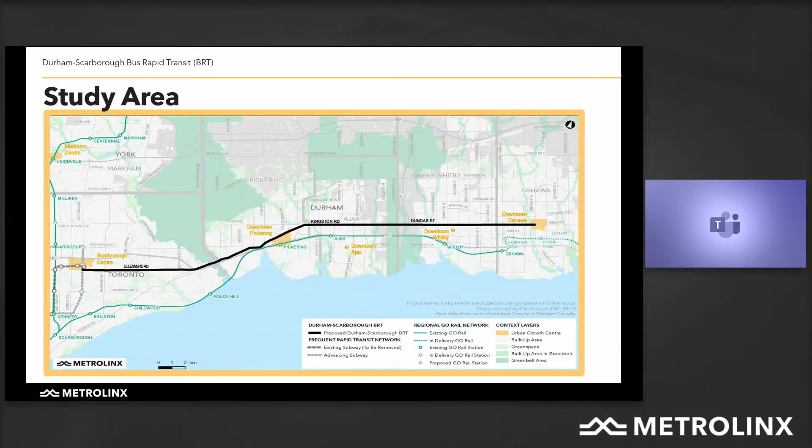If we could move to the next slide, please. So the study area for this project extends for 36 kilometers from downtown Oshawa through the western part of the city of Oshawa, through Whitby, Ajax and Pickering, crossing into Toronto and then transitioning up from Highway 2 along Ellesmere Road as far west as almost McCowan, where we will interface with the planned extension of the Scarborough subway. So the 36 kilometers will have about 49 stops along the route, spaced to provide good service along the entire corridor. You'll note as well that the GO train service is also there, shown in the green line closer to the lake. It actually serves quite a different travel market.

The GO train users tend to be focused on travel into downtown Toronto, and you'll also note that the GO train really does not serve the Scarborough Centre area or downtown Oshawa particularly well. So what we find is that this service is being proposed to be operated by Durham Region Transit, to run in parallel with and augment the network of routes and services that are provided for the residents of the east end of Toronto and for Central Durham Region.

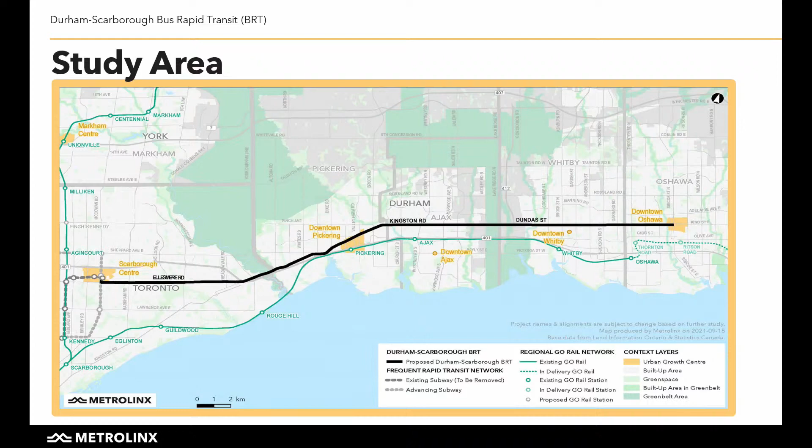Could I have the next slide, please? So as I mentioned, it is a 36-kilometer route through 5 municipalities. It will build on the TTC service along Ellesmere as well as the Durham Pulse 900 route, which is the heaviest used route in Durham Region Transit, carrying more than 3 million passengers last year, or the year before. It currently terminates its western limit at the University of Toronto Scarborough campus. The intention is to extend that route to Scarborough Centre, into the subway station, and to allow Durham to pick up passengers along the corridor.

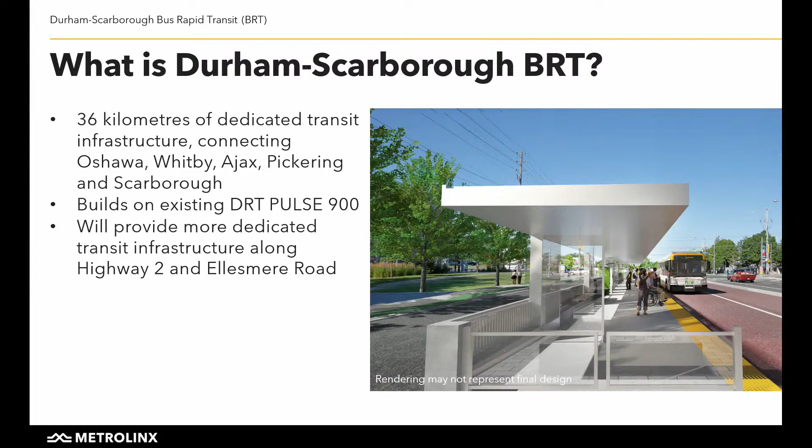So people who live in the Toronto segment, or who are traveling in the Toronto segment, will be able to use either vehicle to move along the corridor in the dedicated lanes. As well, the dedicated infrastructure is being proposed to improve the speed and reliability of the service, primarily the reliability. We know that every transit trip is at least twice as long as the average car trip. So providing this kind of reliability, and providing higher quality stations as we see here, will encourage more people over time to take public transit as the region continues to grow.

The next slide, please. So BRT is more than just buses and more than just lanes. It's a combination of a whole series of things. As I mentioned, dedicated lanes are good for shortening travel times, as well as improving the reliability of the service. Anyone who's waited for the bus knows that if you wait longer on the occasional time, you start to plan for that every day. What we're hoping is that you will not need a timetable to know when to go out for the bus — they'll be there every 5 minutes or more frequently during peak periods. You go to the nearest stop and get on the bus without having to think about it. It also includes smart traffic signals that will be installed and will communicate with the buses so they can be held as green, allowing the buses to move more smoothly and stay on schedule.

What we also find with these smart signals is it actually makes for smoother traffic flow for everyone using the road. The service will also provide better connections along the corridor.

The dedicated lanes in the city of Toronto will provide common stops for TTC as well as DRT and the occasional GO bus. But we've also planned stops for all of the perpendicular bus routes so that people who need to travel north or south off of the corridor at the beginning or the end of their trip, or both, will be able to do so quite conveniently.

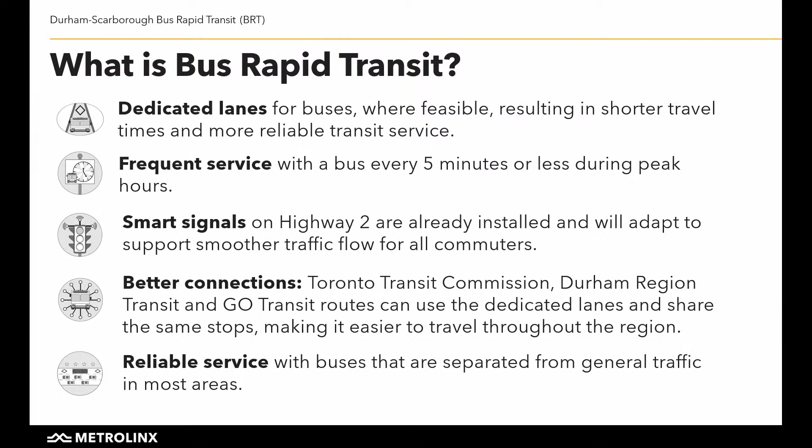As I mentioned, the reliability of the service comes from separating it from the general traffic. We see several other benefits of that, including enhanced safety, reduction in left turn accidents, and other benefits along the corridor, which we'll discuss a little bit later.

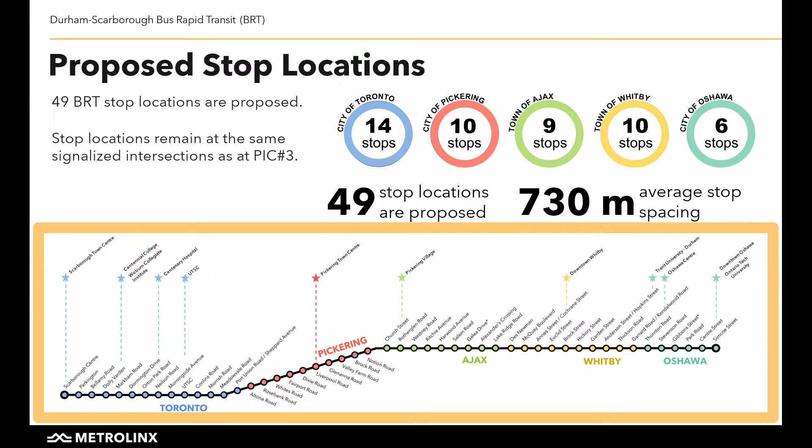As I mentioned off the top, we're planning 49 stops, about 730 meters apart. That's typical for BRT—a little wider than spacing on a typical bus route, but that allows us to have good quality service in terms of average speed and coverage. The stops are closer together at the west end near Scarborough Centre and in urban areas like central Pickering, Whitby and Oshawa, and further apart in areas like the Rouge River Valley or Highway 412, where there's really no origin or destination for people.

So I'm going to quickly run over the preliminary design in each of the areas. In Toronto, there are 6 different zones, starting at the west end, just where we come out of Scarborough Town Centre. The Scarborough subway project is looking at the final connection and the number of bus bays in the bus loop with the subway station.

Our work actually begins with the first physical infrastructure on Ellesmere Road, starting at Grangeway, one block east of McCowan. From Grangeway all the way out to Morningside, just west of the University of Toronto, the intention is to widen the road from 4 lanes to 6 lanes, maintaining the 4 current travel lanes for cars and adding 2 lanes for BRT. That will allow existing traffic to travel as well as providing increased capacity for transit.

In Zone 2, in front of the university, the design is coordinated with the Eglinton East LRT as well as the university's master plan. The buses will transition out of dedicated lanes to the curbside to match the stops for Eglinton and the university. Just beyond a realigned Military Trail, we get into Zone 3. From the east side of the campus as far as Meadowvale, the intention is to maintain the existing 4-lane roadway but convert it to 1 lane in each direction for general traffic and 1 lane in each direction for transit.

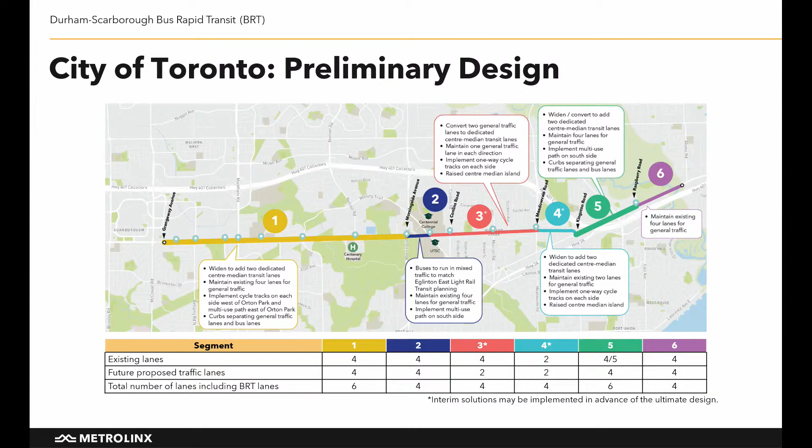Moving into the city of Pickering, the intention is to widen the road from 4 lanes to 6 lanes everywhere that has not already been widened throughout the entire width of the town. In some areas, there are curbside bus lanes implemented over the last 3 or 4 years. As the median BRT is implemented, those curbside lanes will transition to median lanes, creating a continuous center BRT across the city of Pickering.

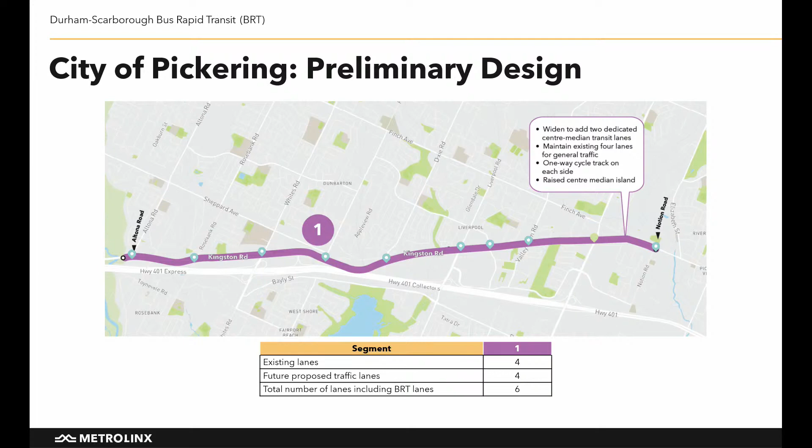Within the town of Ajax, we have 3 separate segments, starting at the west end between Notion Road and Elizabeth Street in Zone 1. The intention here is to maintain the existing number of lanes and add the transit into the median.

In Zone 2, we're into the historic Pickering Village, which begins at Elizabeth Street and runs as far as Rotherglen Road. The intention here is to widen the road but actually create what we call an asymmetrical road—a 5-lane cross-section, with 1 general lane of traffic westbound, 2 BRT lanes in the middle of the road, and 2 eastbound traffic lanes on the south side. The reason is to balance the need for general traffic, the need to preserve the culture and heritage of Pickering Village, and to provide the transit facility.

What we found in the traffic analysis is that the westbound traffic in the morning can be handled in a single lane of traffic, but the eastbound traffic in the afternoon requires 2 lanes of travel. So we've adopted the 5-lane design in order to balance those 3 priorities.

East of Rotherglen Road and as far as Lake Ridge Road at the east limit of Ajax, the intention is to widen from 4 lanes to 6 lanes to insert the 2 BRT lanes in the middle and maintain the existing capacity for cars and trucks. Go to the next slide, please.

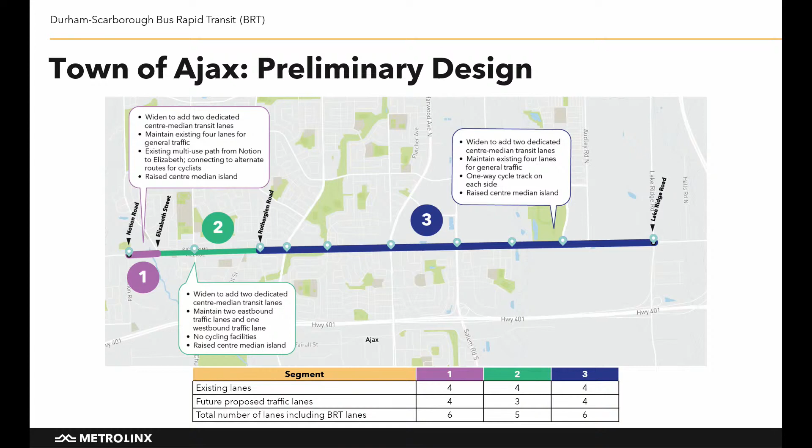This is to balance off the need for business access, the need to continue to move cars and trucks through downtown without diverting into local neighborhoods, as well as providing the highest degree of transit priority as we can. So the intention there is to balance the use of the road with the use of the space adjacent to the road and maintain the community without causing a lot of local traffic infiltration.

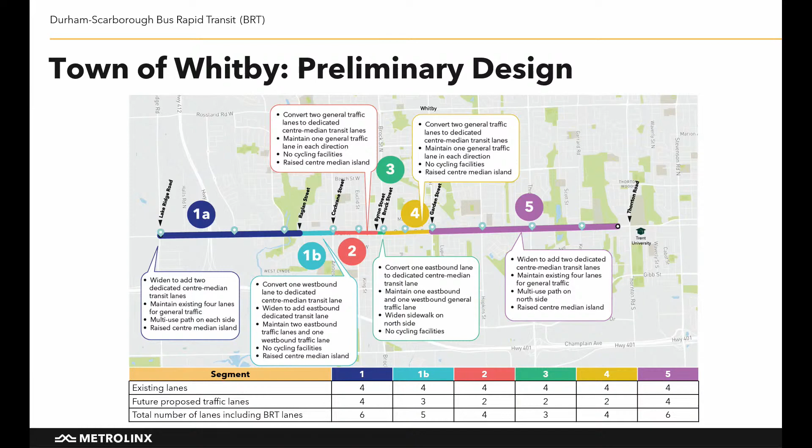There are still a few things to sort out there, but generally that will be the solution. Could I have the next slide, please?

At the easternmost end in Oshawa, there are 3 segments, starting at the Whitby boundary as far east as around Waverly Street, where King Street and Bond Street split into a 1-way pair. We will be widening from 4 lanes to 6 lanes and inserting bus lanes in the middle.

Once we get as far east as Waverly, we'll be inserting a new traffic light, both to allow for westbound left turns to get down into the community behind Trent University, but also to get the buses through that intersection where they will then transition out to the curb.

Through downtown Oshawa on the 1-way eastbound King Street, we will be having a dedicated curb BRT and 2 through lanes of traffic. When we get as far east as Simcoe Street, the BRT lanes will end, but the buses will continue in mixed traffic as far east as Ritson Road, where they will have a layover that's currently used by the Pulse 900 service.

They'll come back westbound in mixed traffic as far as Simcoe Street. And when they get west of Simcoe Street, again, there will be a curbside BRT lane along the 1-way street of Bond Street all the way out until it connects back in at Waverly there and then rejoins zone 1. Go to the next slide, please.

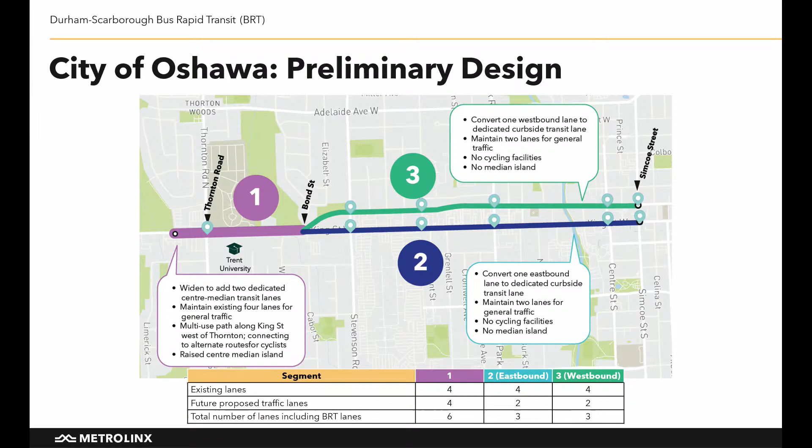So a little more detail at the east end of the corridor. The intention here is that the buses will go east on King Street and north on Ritson Road to the layover, which is on William Street, just south of the Costco, for those of you who know the area well. And then the buses will return westbound on Bond Street.

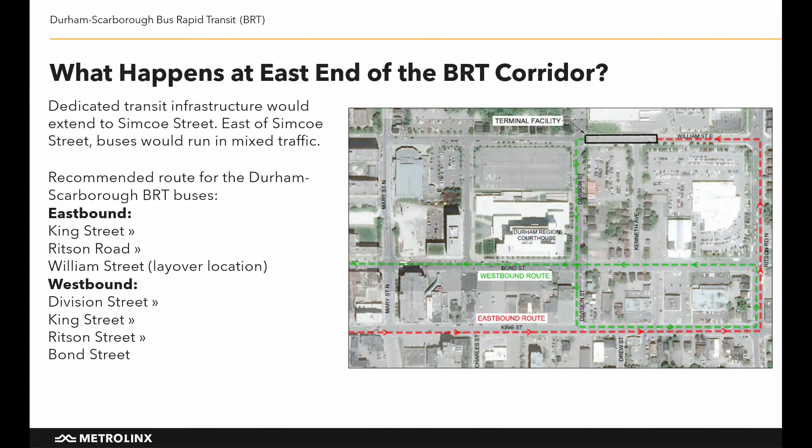This will be an interim condition. The intention is when the GO train line is extended further east and there is a new GO station at the south end of Ritson Road, that this service will be extended from Simcoe Street to the Ritson GO station, but that will be part of a future study. Can I have the next slide, please?

As I mentioned at the west end, the dedicated facility we're looking at will extend as far west as Grangeway Avenue. You can see the star on the map, which is the proposed bus terminal for the Scarborough subway. That project team is looking at the size of the bus terminal to suit all of the routes that will feed in there, and they will be providing bus bays for the BRT service, which will then operate in mixed traffic on Grangeway Avenue before joining the dedicated lanes eastbound and westbound in the middle of Ellesmere Road.

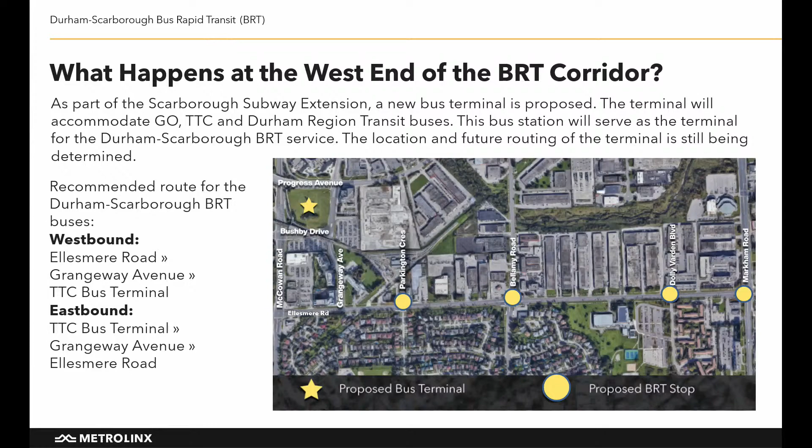Go to the next slide, please.

As part of the TPAP study, we are required to do a series of environmental studies. They're intended to document the existing conditions so we can understand what's happening. We then look at the project footprint and superimpose that over the existing conditions to look for any potential impacts, and then look at ways to mitigate or reduce those impacts, either through modifying the design or finding mitigation measures. All of these studies are nearly completed and will be included in the environmental project report released in January 2022. They cover the full range of features.

We're looking at natural heritage, flora and fauna. We're doing a complete tree inventory, a noise and vibration and air quality assessment, and looking at the impacts of climate change, drainage and stormwater management. On the social environment side, we're doing a stage 1 archaeological assessment, a cultural heritage resource assessment, as well as a socioeconomic and land use study, so that we have a complete picture of what's happening, as well as developing a complete set of mitigation measures.

Can I have the next slide, please?

What we have found on each of these studies is that this is a highly urbanized corridor, not surprising given where we are. Other than a few localized spots, the typical mitigation measures that would come from a typical road widening construction project will address all of the environmental issues we're finding. We're expecting that the impacts would be very similar to a road widening.

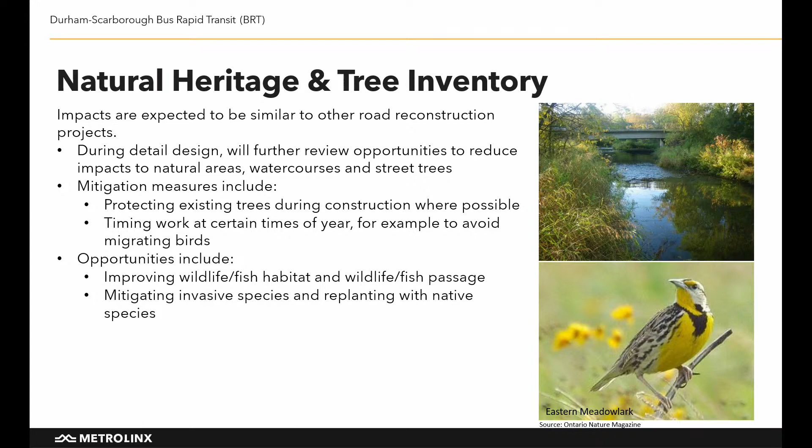Cultural heritage and archaeology: we've been through a full assessment of all of the buildings, done through a visual assessment and a review of all the municipal, provincial and federal registers for heritage structures. We've done research on properties that appear to have heritage character, and worked with advisory committees in each of the municipalities to understand what they know about some of these buildings. We're also working with Indigenous nations as well as the Ministry of Heritage, Sport, Tourism and Culture Industries to understand the history of the area and document all of that.

We are finding a number of properties where there are heritage buildings that may be impacted. In that case, we are looking at mitigation measures that include things such as changing the design to shift a widening of the road to the other side of the street where possible, or potentially shifting buildings slightly further back so they maintain the same relationship to the curb, but are slightly moved further back.

Of particular interest are cemetery investigations. By law in Ontario and in most of Canada, anytime you're within 10 meters of the known boundary of a cemetery, you're required to do a more intensive investigation. That's because the historic boundary of a cemetery could be different from the current boundary, and we want to make sure there are no human remains outside that will be disturbed by the project.

In this project, as in every project, if we do find archaeological materials during our work, we will stop and the site will be protected until it can be reviewed by a licensed archaeologist. The artifacts recovered will be fully documented and used to augment our knowledge of both post-contact and pre-contact things that have happened in the area.

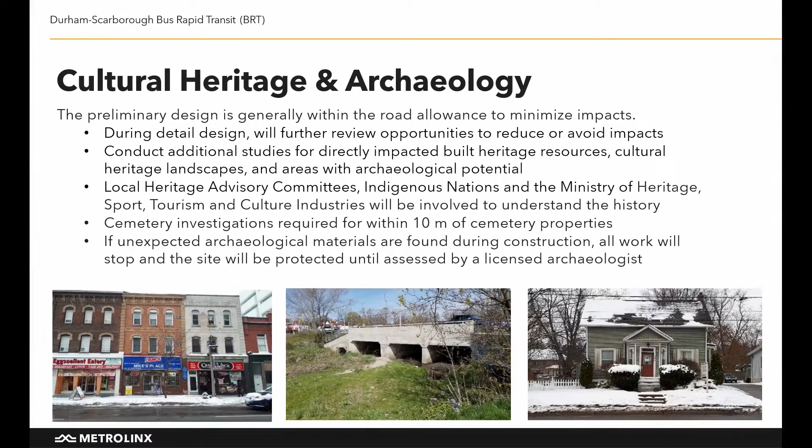We also know in our changing climate that we need to be very careful about stormwater and the management of bridges and structures along the corridor. There are 28 water courses or drainage crossings of the corridor, as well as 4 railway and highway crossings. So there are a significant number of bridges and culverts that need to be addressed.

We've assessed each one in terms of its existing carrying capacity, as well as plans that each municipality and the 2 conservation regions have for each of these watercourses. So we are looking to make sure that where we are modifying structures, they will be upgraded to meet current hydraulic expectations. We are looking to strengthen some of the older structures, as well as increasing the resilience of our watercourses to deal with larger storm events.

We're also, in reviewing these structures, coordinating with the local municipalities to make sure that plans they have to maintain some of their structures, particularly in Oshawa, Whitby, and Toronto, are coordinated such that the municipality doesn't do an improvement in the short term, only to find that when we come in 2 years later, we need to undo that improvement. So those are being coordinated.

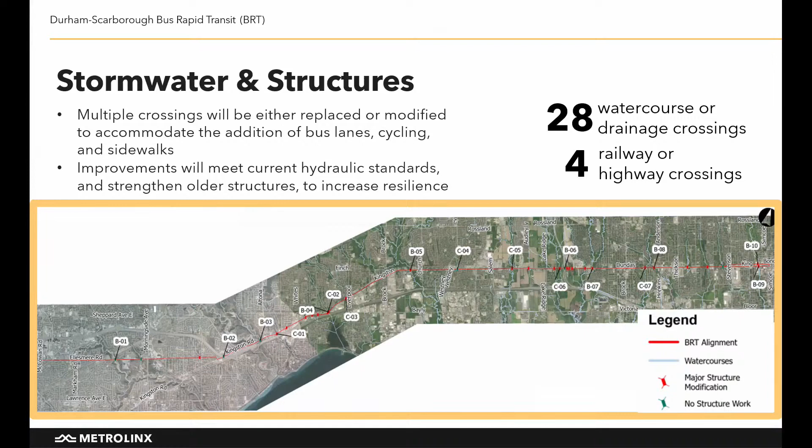In terms of air quality and climate change, we have done a full air quality model as well as a noise and climate change model. So we are looking at how we can be more resilient, and looking at how we can mitigate construction impacts on air quality. We're looking at how we specify things like low emission construction equipment, or look for greener alternatives for both transit vehicles as well as construction vehicles.

In the initial business case, we estimate this project will save 162 kilotons of carbon dioxide with the level of travel. So it's a fairly significant change in terms of working to improve the air quality along the corridor.

We're also looking at opportunities to reduce greenhouse gases by encouraging more public transit, by providing a competitive service, as well as by planting trees, which have the ability not only to help offset pollution, but also to help us in storm events in terms of capturing and controlling stormwater.

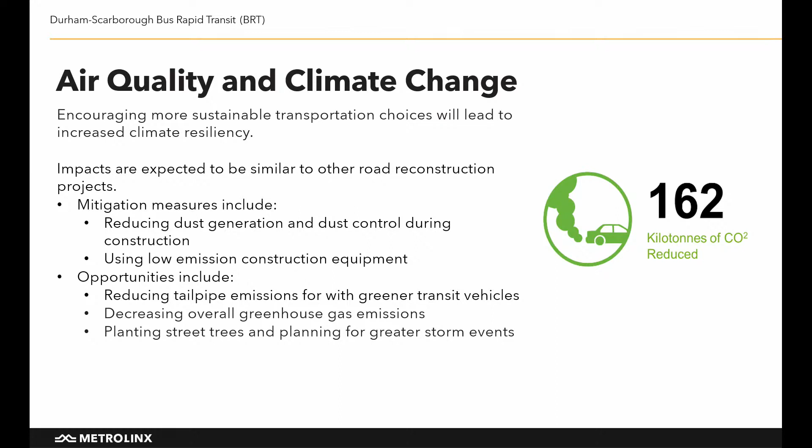As I mentioned, noise and vibration, the primary source of noise and vibration is either during the construction activity or with the traffic that runs along the highway. We've identified 40 potential sensitive receptors that we've used as test cases to understand noise along the corridor. So we are looking at the impacts. It's very typical to other road widening projects.

The typical mitigation measures will be applied. So we'll be looking to use low vibration construction equipment wherever feasible. We'll be looking to restrict construction hours. And there are a number of limited locations where additional noise barriers need to be installed in order to protect outdoor living areas along the corridor. Those locations are identified on the plans available at the Metrolinx Engage website.

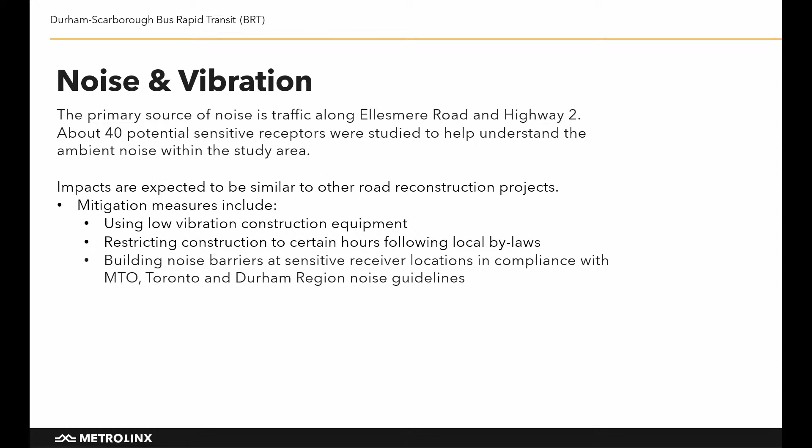The socioeconomic and land use study is looking at the growth along the corridor. There are several designated growth centers under the Places to Grow Act: downtown Oshawa, downtown Whitby, downtown Pickering, and Scarborough Centre. The intention of this corridor is to join those together to encourage more travel along this corridor by public transit.

We do know that with the mix of employment lands and retail lands and residential lands, about 40% of the trips made along this corridor begin and end very close to the corridor, which is ideal for encouraging people to use public transit for more of their trips more frequently. We're also looking at where the growth is being planned by each of the municipalities to make sure the stops are being placed to be coincident with the higher order development and making sure that we can serve things appropriately.

We do know that some businesses are more sensitive to disruptions like parking, so we are also looking at how we can limit that and control that.

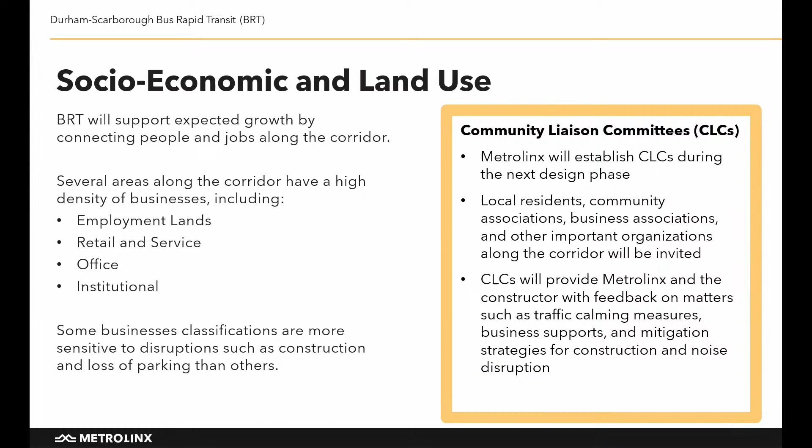As part of moving forward with this, Metrolinx is also committed to establishing community liaison committees with local residents, business associations and other stakeholders to address very localized issues, not only to help understand what the project will look like in its detailed design phase, but also how we can support business and support the neighbors while we construct the project. We do know that road construction can be disruptive, so we need to work together to create the right expectations of the community, as well as manage any local closures of side streets or driveways so that there's no surprises. You know what's going to happen and you'll be well informed.

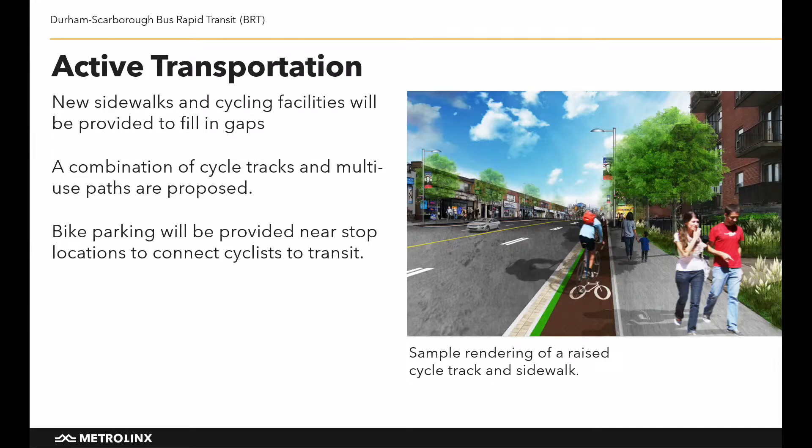Building a 36-kilometer BRT is not something that will be done overnight, nor all at the same time. We've been working on an implementation strategy with all of our partners to look at how we can phase this in. The intention is to build this in segments that can be done in one or two construction years, so there won't be long periods of construction in front of any one location.

This is not the same as the construction on the Eglinton Crosstown, because with BRT we don't need to relocate utilities or build track infrastructure in the middle of the road. It will be more akin to a local road widening project.

In stage 2, we'll complete the transition across Pickering, including converting the curb lanes to median lanes, and finish up more of the segments through Ajax.

The third phase, currently of undetermined timing but likely sometime after 2025 or '26, will see the pinch point areas in Pickering Village and downtown Whitby, as well as the eastern end towards Oshawa, coming towards the end of the project.

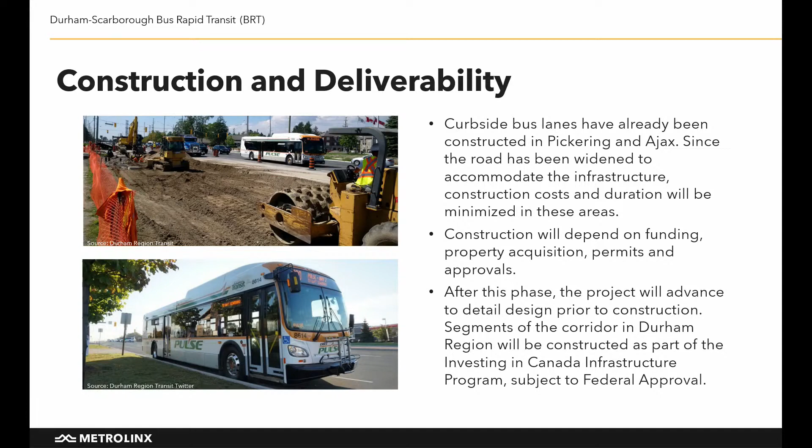The next steps: the TPAP commenced a week ago. It will be online through these 3 PIC events, as well as online until November 11th. We'll take all input from these meetings and directly on the site, documenting it as part of the process and using it to refine the project. The draft environmental project report is being circulated to municipal, provincial, and federal agencies. Once their comments are incorporated, it will be available for public review, planned for January and February. The notice of completion will be issued when ready, followed by a 30-day public review period and then the minister's review.

The preliminary design business case is now getting underway, now that we've finalized the design and are working on cost estimates. The intention is to release that early in 2022 as well. That'll be one of the two documents, the EA and the business case, used to move forward with funding.

To stay up to date with the project, you can email us at dsbrt@metrolinx.com or go to metrolinxengage.com/dsbrt. Those will stay active throughout the process so we can continue to stay in touch. If you'd like to be added to our mailing list so we can notify you when the notice of completion is issued, please do so, and we will be glad to add you.